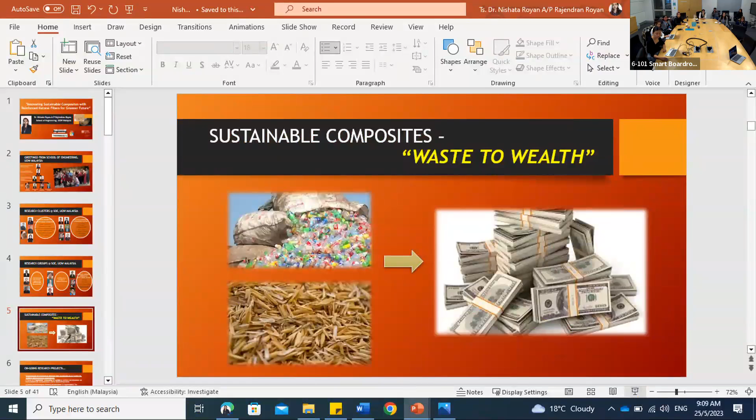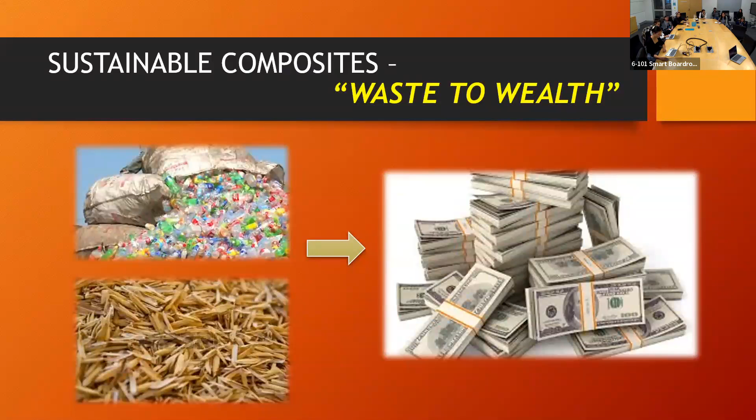Okay, sorry, so this is what I do actually - I convert waste to wealth. There are a few ongoing projects under me. I can't cover everything today, so I'm going to cover only one of the projects, but all my projects are related to natural fiber reinforced composites.

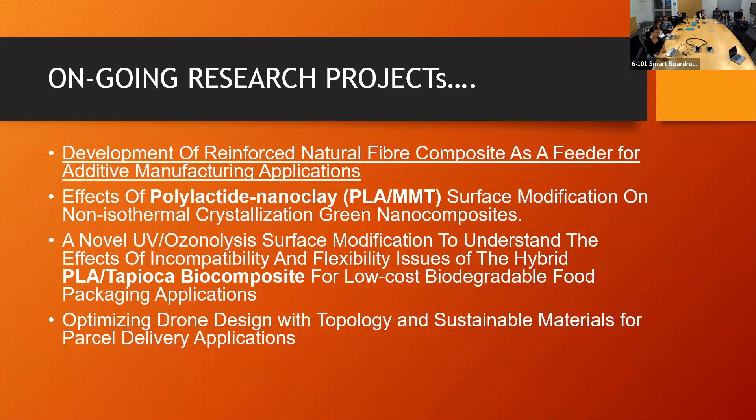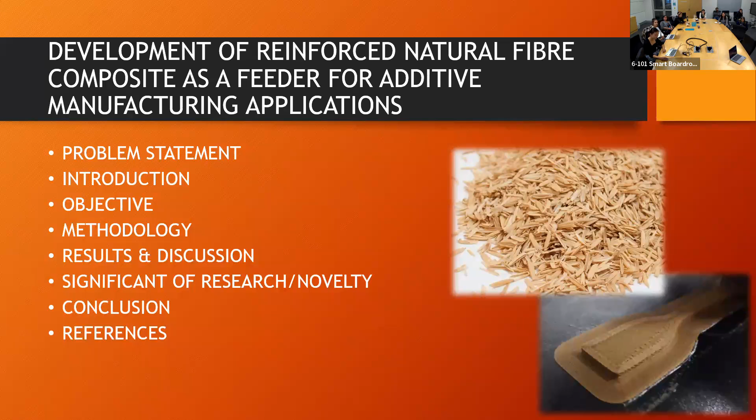I'm going to talk about the first project here, which is development of reinforced natural fiber composite as a feeder for additive manufacturing application. The title is lengthy, so let me summarize: I play with natural fiber composites. Using natural composites, I develop a feeder - the filament feeder - for additive manufacturing application. That means I 3D print from the filament that I produce from natural fiber composites.

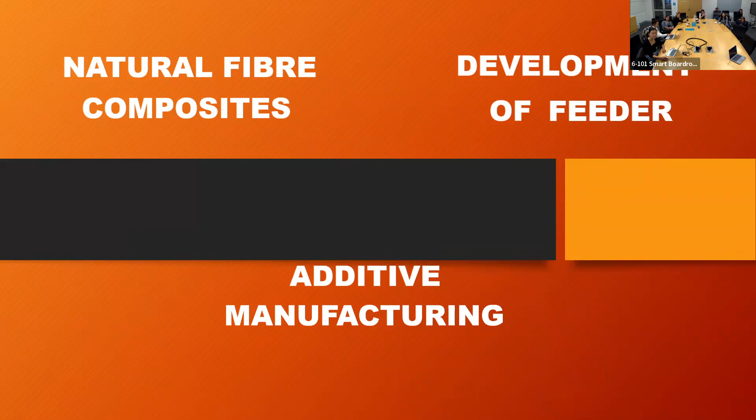So this is the interlink - why do I do this, how do I do this, and what is the outcome? The why will be covered first, and the how is basically the methodology and my results. So let's talk about why first.

Why this project? Why did I choose additive manufacturing? Why did I choose this matrix filler, rHDPE? Why rice husk? As you guys know, how bad is plastic pollution right now? We can see from statistics, 8.3 billion tons of plastic produced since 1950. And from this chart, we can know that from the year 2000, more than half of the plastics ever produced has been made.

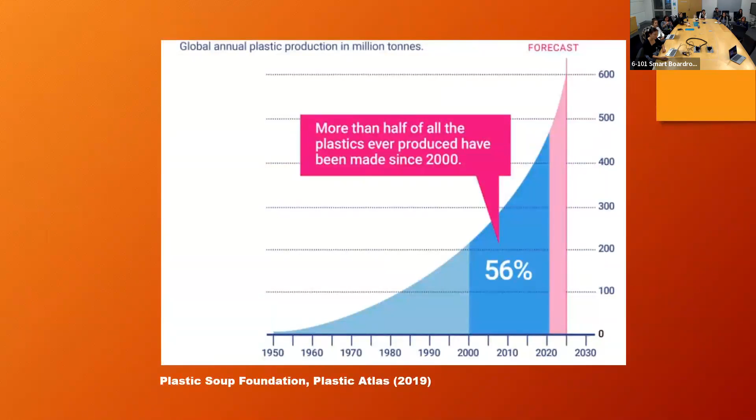If we put this into statistics, each one of us - and we have 8 billion people on Earth now - produces 625 kg of plastic waste during our entire life, which is equivalent to about 12 times my own weight. Just imagine how much plastic we are consuming and producing every day.

So what should we do? What is the solution? Of course, to come out with a green, sustainable earth. This is a solution so that we can meet our current generation's needs and also save resources for our future generation. If not, our future generation will not know what plants are, what natural resources are. They will not be able to know all that.

So why did I choose natural fiber reinforced composite? What is this natural fiber reinforced composite? Basically, I take certain natural fibers - we have kenaf, jute, rice husk, and so many things - and I mix them with a little bit of plastic, which can be biodegradable or recyclable plastic. I come out with a composite, meaning I make more plastic from less plastic. Composites are actually on par with plastics now, so if I can make something cheaper with better strength, why not?

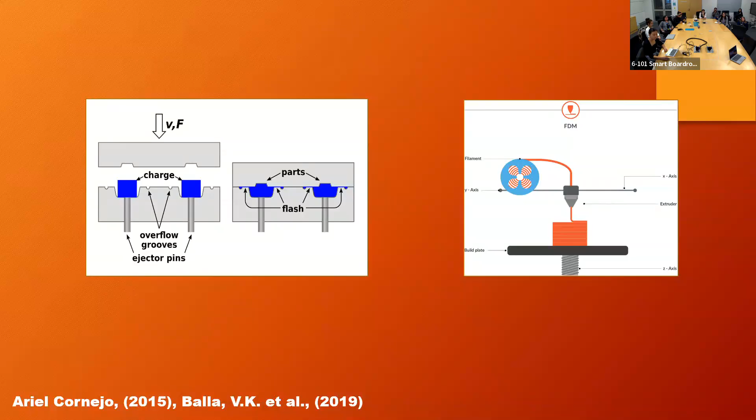Why did I choose additive manufacturing? Of course, we all know if we want to produce something, we need a mold, and making a mold consumes a lot of cost. Let's say we want to test something out just for a pilot research - we can't go through making a mold and the whole process just for that. Additive manufacturing simplifies our work. Imagine I want a pencil with a specific design - I can't go through the whole process of creating a mold just to come out with one pencil, and if there's a mistake in the design, we'd have to do it all over again. With additive manufacturing, I can straight away print whatever design I like. So the conventional method is high cost, while additive manufacturing is lower cost.

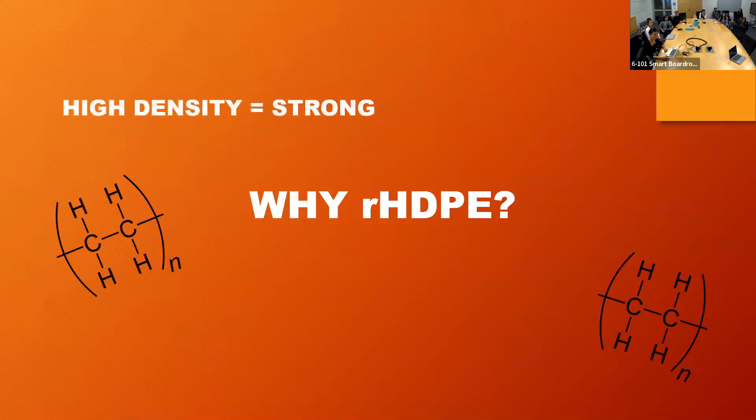So why RHDPE - recycled high density polyethylene? From the name itself, it's strong. It's very durable, very economical, it's cheap, and highly recyclable. These are the main reasons why I chose RHDPE as my matrix filler.

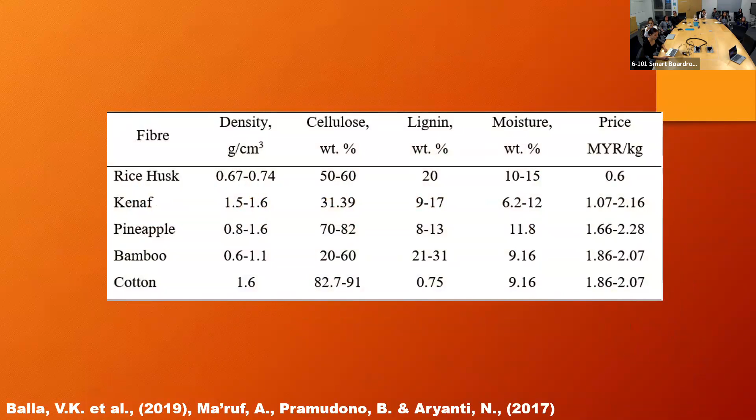And why rice husk? From all the natural fibers, rice husk is the cheapest in Malaysia, and it has a very low density with a very good lignin cellulose content. That's why we chose rice husk for this study - it's also agricultural waste, and we have a lot of this waste in Malaysia and also in Southeast Asia.

So what is the problem statement here? The problem in this specific research is that we have very limited literature because we are starting out to produce a filament which no one has done with this combination of material before. We have issues with HDPE, the polymer itself, in FDM - fused deposition modeling in 3D printing - where the characteristic of the polymer has shrinkage problems, warpage problems, and so on. There is also limited information on natural fiber reinforced composite in FDM, as this is new research, and limited info on filament production.

Nowadays we have big companies offering filament production, but that's for conventional filaments like PLA, PETG, and so on. Yes, they are doing mixtures like PLA wood, but they will not allow us to customize our filament with our own material. So this project is actually meant to solve that problem.

So there are a few objectives here: I study, I design the filament line, I 3D print and evaluate, and then I produce the composite. This is the overall flow plan - I mix, compound, crush, put it into a filament extruder, come out with a filament, 3D print, and get the specimen. It seems very easy here, right?

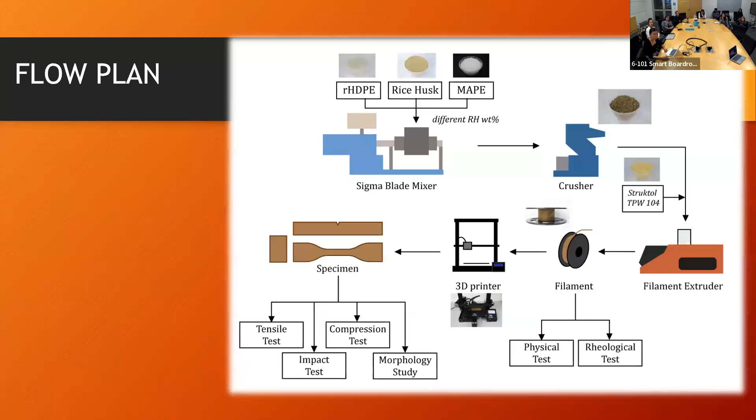And then we 3D print it, and so on.

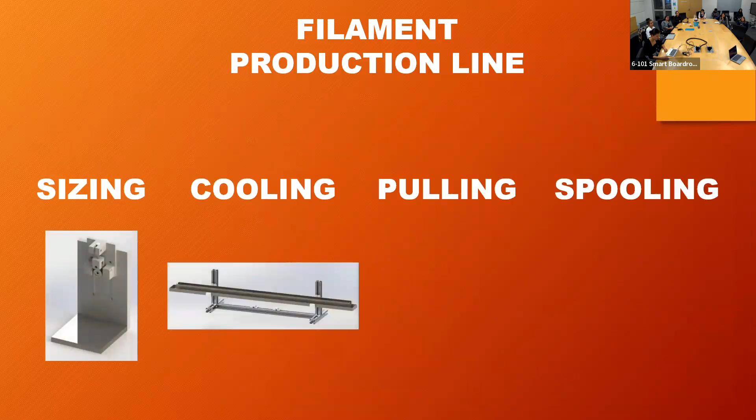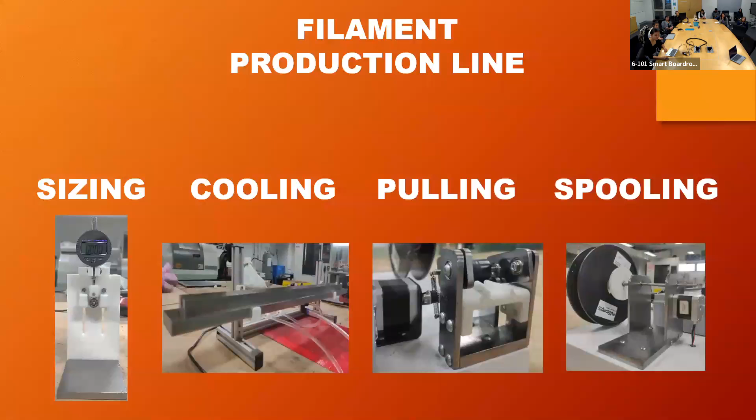So the filament production line has a few stages: sizing, cooling, pulling, and spooling. All of these have been designed and customized. We fabricated them ourselves in our School of Engineering back in Malaysia, using a conventional CNC process for some parts and 3D printing for others.

Once we've done all this, the first picture shows we're making sure the filament size is 1.75 mm, because if it's higher than that it won't go into the 3D printer. The cooling ensures it doesn't swell or shrink. The pulling creates tension so we get a nice filament. And the spooling spools up the whole filament system.

So this is the overall filament extrusion system that we have fabricated.

As I said, this is the initial stage of research, so whatever funds we had, we utilized. Of course, there is a lot of room for improvement here.

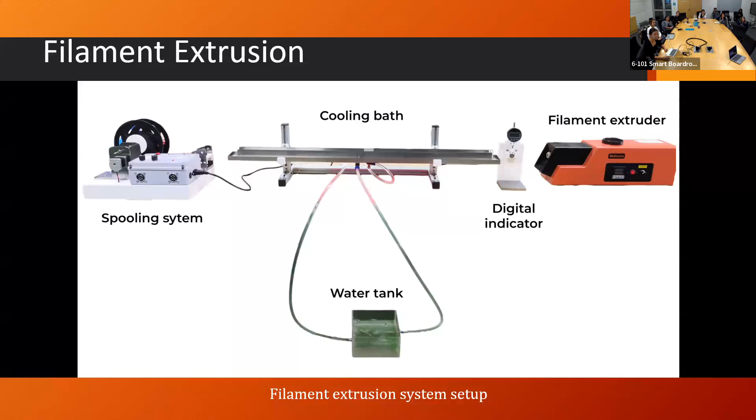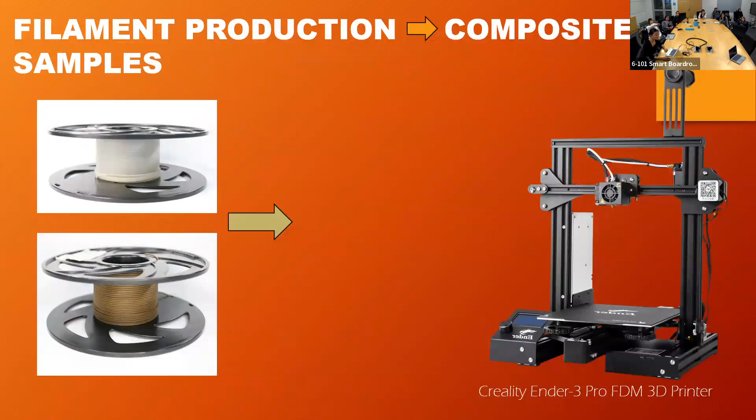With this system, we were able to produce the filament. In the two pictures, the white one is pure RHDPE. We mixed RHDPE, ran it through the system, and got the filament. The picture below is rice husk composite, with about 10% weight of rice husk composition in it.

We successfully 3D printed it. As you can see in these two pictures, we printed it with our normal printer. As I mentioned, due to cost constraints, we can do better than this with sufficient funds, so I'm working on finding sources of funding and collaboration for this project.

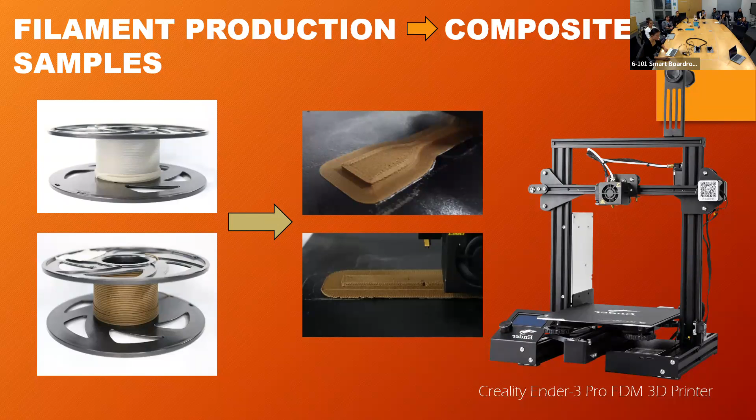We've also done some printability testing. Since this is the first time we're doing this, we're not expecting 100% perfection. There are some things we have achieved, and some things we haven't, which represent research gaps we're currently working to improve.

We achieved the overhang and the rounded shape. We did not achieve the stringing, it was only half free, and we couldn't get the sharp edge. The bridge was also only halfway, so we couldn't achieve that part either.

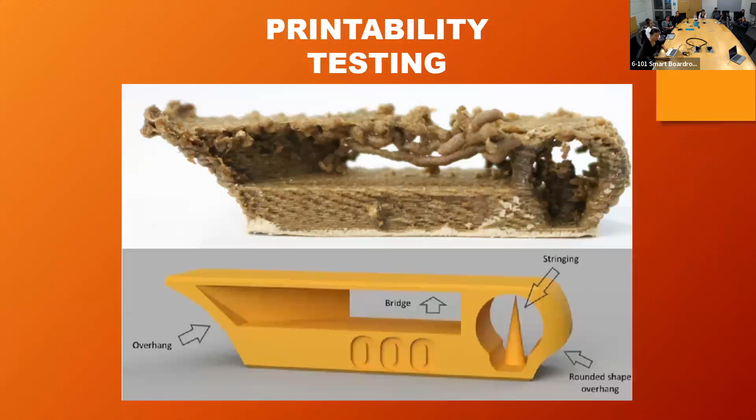So we need to go back again to the compounding process and back to the filament process. This is the stringing we didn't achieve, we got it halfway there, but it didn't join.

This is the sample we successfully 3D printed. It's not easy. We managed this after about 1.5 years of my students working on it, but we got it printed. It can be done, it just needs some improvement.

The top picture is pure RHDPE. As mentioned earlier in the problem statement, pure RHDPE has warping and shrinkage issues, and it does not stick to the printer bed or to anything by itself. So we had a very hard time getting RHDPE to stick or print properly.

We needed certain rafting and settings to manage it. You can see some warping at that corner. This is the rice husk composite, we successfully printed it, but there are a lot of voids and gaps in the specimen itself.

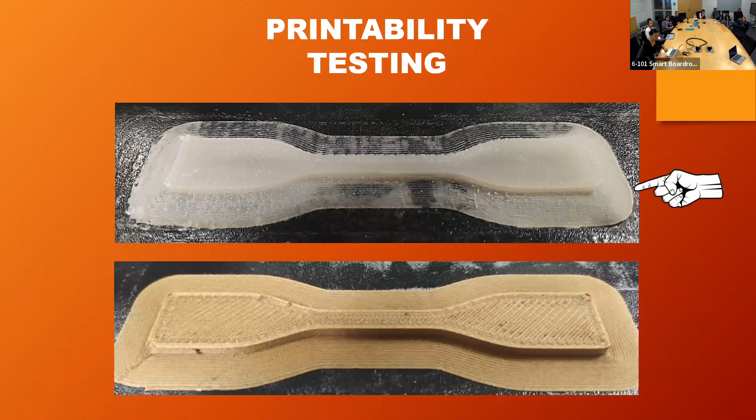So these are all the printed samples. The warping is very, very bad, you can see it's super bad, in compression and tensile specimens. From here, we can say that yes, it is printable, it is feasible, but there is a lot of room for improvement.

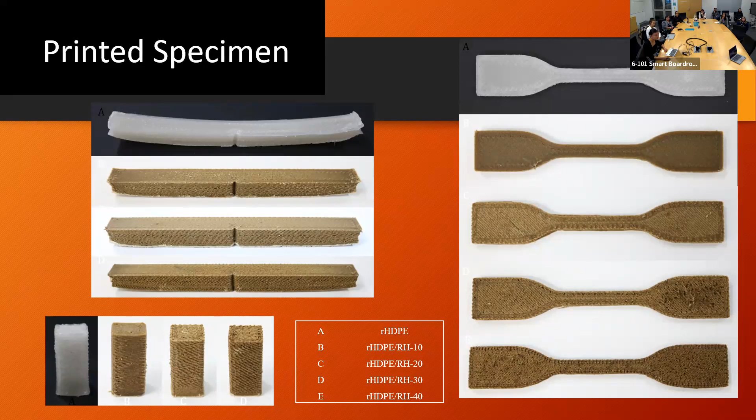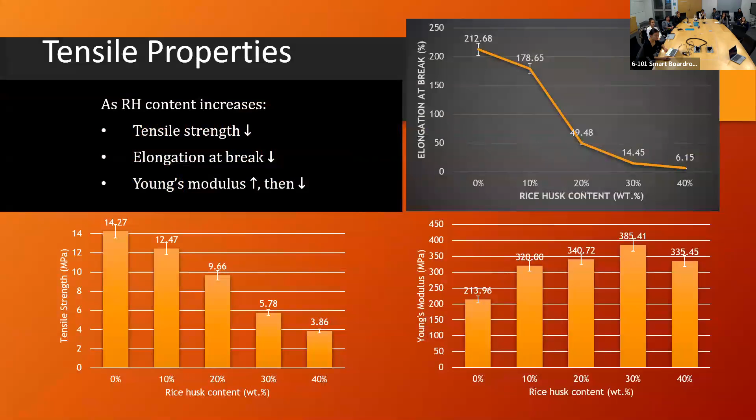These are all the mechanical properties, I won't go into detail. We have results for samples A, B, C, D, representing different weight percentages of rice husk composition, along with their tensile properties, compression properties, and impact properties.

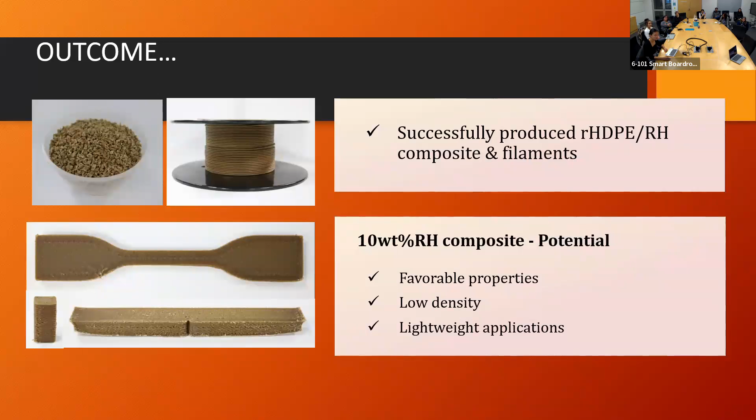So this is the outcome. We managed to compound, we managed to come up with a filament, and we managed to 3D print. So we have successfully printed the specimen, but of course there's a lot of room for improvements needed. So why are we doing all these projects?

So we can actually apply it in the automotive industry, where we can customize with a sustainable material. So let's say your armrest in your car, you want it in such a design. We can come out with a design and print it for you with a sustainable material, a cheaper cost, and a lighter weight. And of course, with a lighter part, you save on the weight and you save on the consumption as well. So everything goes back there.

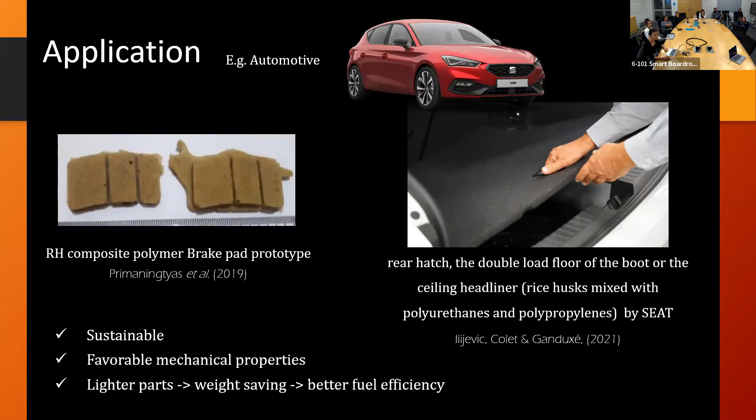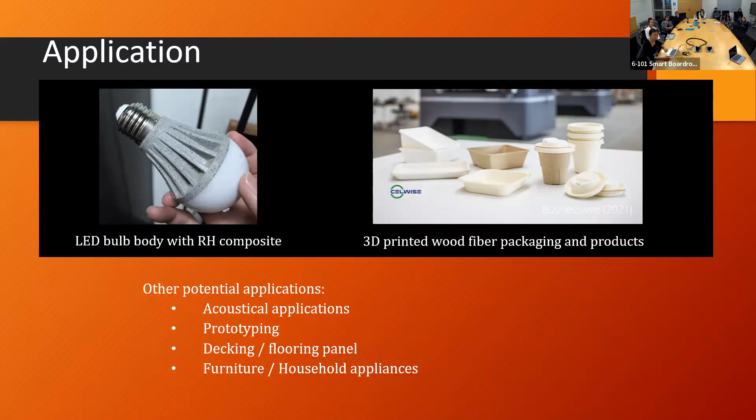And also 3D printed wood fiber, we are also looking at that. This is what we have tried, ongoing. I've seen the cafes around here, everyone is using wood, right? Assume wood. So why not we substitute the wood with some sort of natural fiber composite, like rice husk?

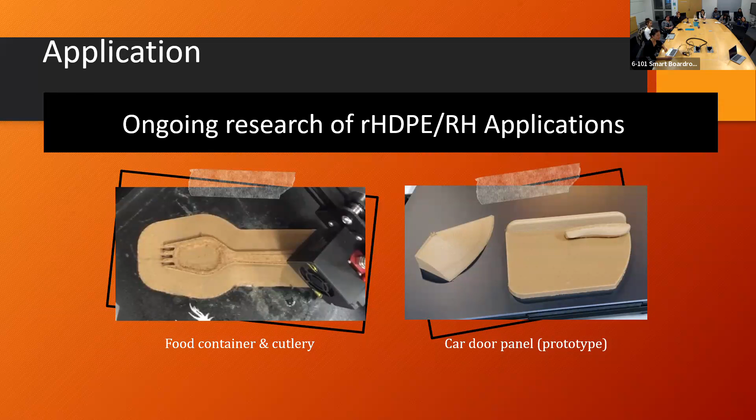Because with wood, we still have to get the timber, and the timber we still get from the forest. So we are actually contributing to deforestation. When I visited SBRC, everything was in timber. So maybe we can work on something where we put in composite rice husk material to replace timber. That's what we are working on.

So these are the future recommendations. You can see there's a lot of gaps in this research, but we are working on it.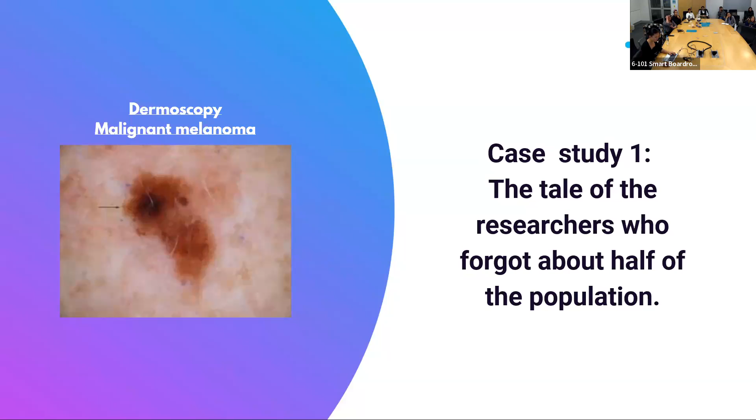So we move on - next case study is my own tale. Once upon a time, I was doing my first research involving machine learning, and I chose to deal with concrete because it was a demand we had in our lab. We work with non-conventional concrete, like slag concrete, fiber concrete, graphene oxide, and so on. We cannot use the same methods for mix design on non-conventional concrete as we do for conventional concrete. So we thought, we have this tool that does really difficult calculations involving anything - let's apply this to our research.

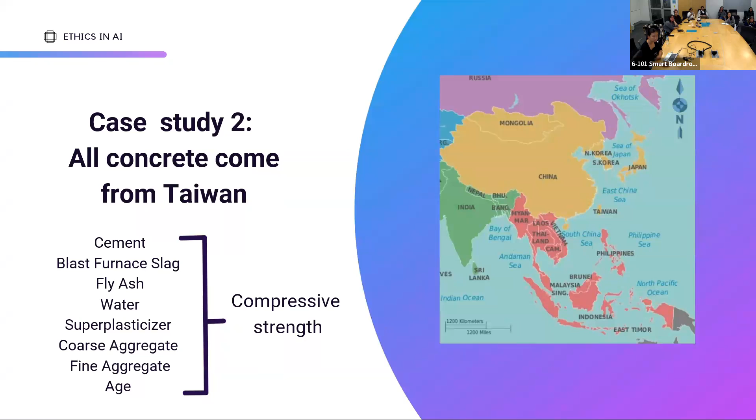Before starting with non-conventional concrete, we tried to understand how it operates in conventional concrete. We got a set of 1,000 concrete mix designs - they come with cement consumption, water consumption, aggregate consumption, and deliver the compressive strength of the concrete, which is what we usually aim for. I'm a civil engineer. We used our models on this data set of 1,000 concretes from a Taiwanese researcher, and compared it to the literature. People had amazing models with 0.89, 0.93 determination coefficients. We got 0.82, but we used a really small fraction of the data. So it was great results, and I said, congrats, let's publish it.

Then we had another set of concrete mixtures laying around from different work. So I said, we've trained our model with this concrete from the Taiwanese researcher - why not test it with this other data set that we have from all over the world?

So we trained with about 400 mixture designs, and we tested with 339 other mix designs, and we got 0.42. I'm like, what is happening here? Why are our results so low, especially compared to the literature?

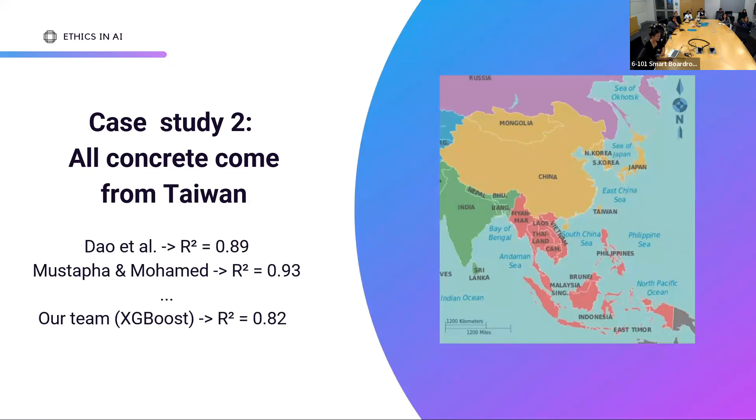Everybody was getting 0.85, 0.95, and so on. So we tried to dig out what was happening in the dataset, and we found out that the dataset was assembled in Southeast Asia and East Asia, with research on concrete from 87 to 97, and we know concrete technology has grown since then. And the aggregates were really small, nothing like what people usually do nowadays. So it's not that our model was bad, it was just not representative of reality.

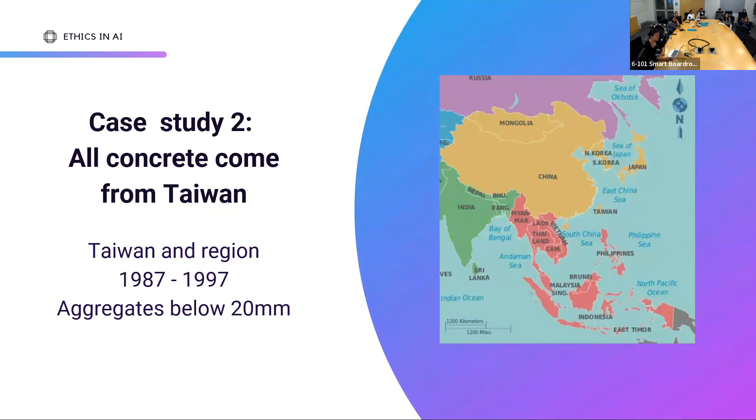So now we published it. We used this argument and published. We were talking about what's happening there. Are these things still happening everywhere else in the world?

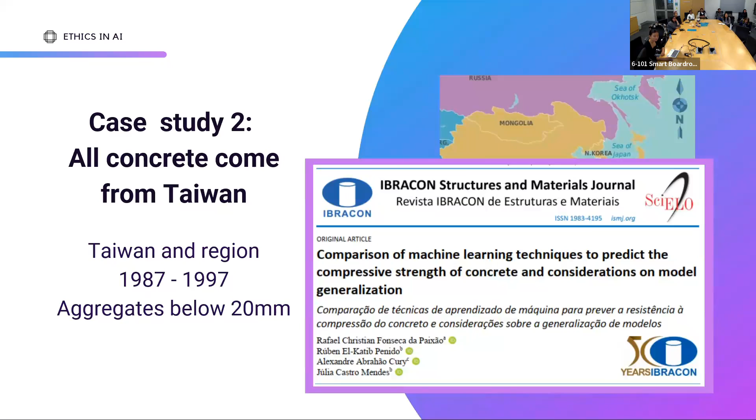We tend to think sometimes that algorithms, or the models generated by them, are fair, unbiased, impartial, because they use mathematics and statistics, really hard stuff. But it's not purely objective, because even though the calculations might be impartial, AI is about data, and not all data is unbiased. So if you have data with gender, race, or any other type of imbalance, the algorithm will perpetuate those biases.

A good example of this happened with Amazon in 2018. It was really controversial. They used a machine learning algorithm to pre-select resumes of applicants, and they trained this algorithm with their own database of developers, which were mostly men. So, to no one's surprise, the algorithm only picked men for that selection process.

So based on these stories and the things we've been seeing around, doing in our labs, being published, my team and I came up with a seminar: the 7 sins of AI algorithms. So buckle up. The first one: inconclusive evidence and unjustified actions.

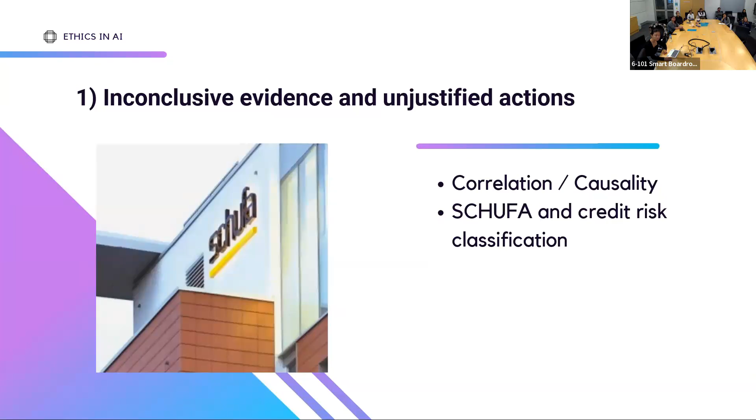Second thing: incomprehensible evidence and opacity. Most machine learning algorithms are what we call black boxes. You know the input, you know the output, you don't know what's happening in between. This is really important when we're talking about things that deal with human lives.

When you're applying this to concrete, to structural engineering, to robotics, or to automation—autonomous cars are a big example—there have been fatal accidents, but we don't know how the algorithm operates, so we don't know why the accident happened. How can that be?

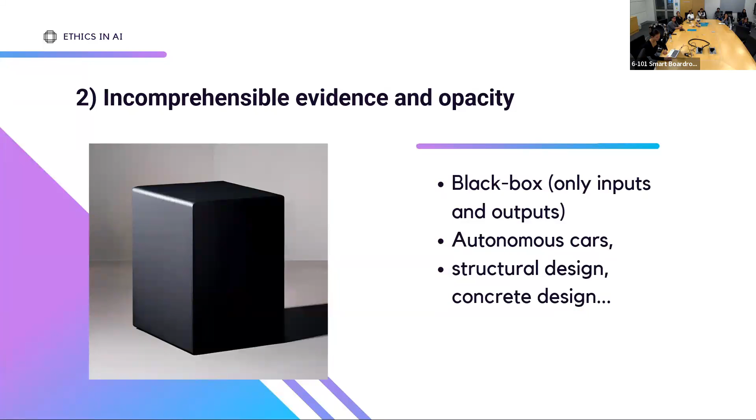The third thing is misguided evidence and biases, because the quality of the automated decisions algorithms make is based on the quality of the data they process. So when we train, for example, the Amazon hiring case, or when we're building models with a Taiwan-based database, it doesn't mean the algorithms are inherently bad, but we must recognize the conditions and limitations of what we're developing and proposing. Otherwise, we are very faulty with our ethics of work.

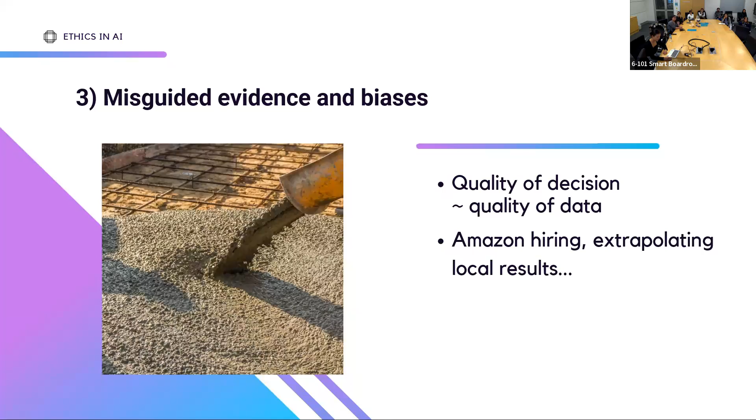For example, the melanoma model could prevent people of color from getting early access to treatment because it was wrong. Imagine if it were implemented in a real hospital.

Also, we've been visiting labs, and some of the labs we visited in the Industry 4.0 hub were only designed for right-handed people. So left-handed people wouldn't get enough training—their training wouldn't be as good.

I'm stopping here a little bit to focus more on number 5, which is negligence, because it's the one we've been seeing a lot in our practice nowadays.

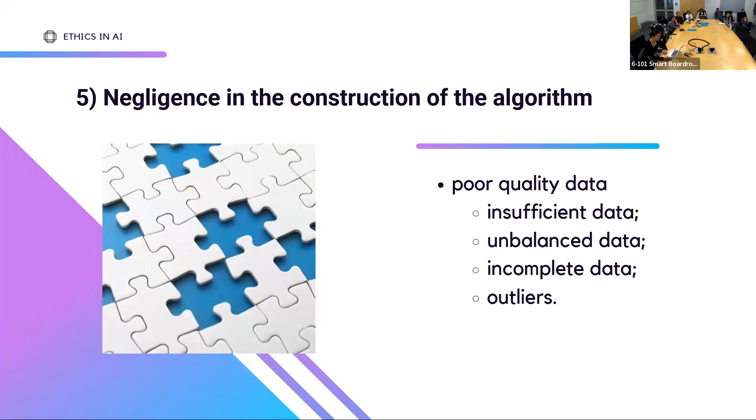The first item of negligence is poor quality data, like I mentioned as an example earlier. We have insufficient data, unbalanced data where some categories are much more represented than others, incomplete data, and outliers. We have to analyze our data before developing the model and take the measures necessary to correct them. For example, getting more derma photos from other types of people around the world would be an option.

We also deal with overfitting, which is when the algorithm trains so particularly to a certain model that it memorizes it, and instead cannot be generalized to other types of concrete, like the Taiwanese example of concrete. We have underfitting as well.

Underfitting is when our model cannot accurately represent any correlation, any pattern—the model is just not adjusted to the data. There are several tools and strategies to improve your performance, but most of the time we end up falling into overfitting because it's easy. Everybody wants to see great data. We think you can only publish if you have an R2 above 0.9 and so on. This is poor science being done.

We also have something called data leakage. We usually think of data leakage in terms of privacy concerns, but here I'm talking about some of your inputs from the testing data set going into the training data set.

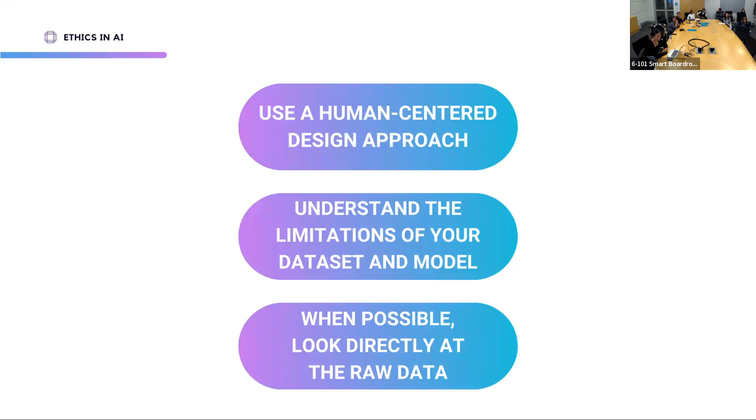Second, understand the limitations of our dataset and our model. And third, when possible, look directly at the raw data. We have to understand our input data as much as possible, because what we feed is directly tied to the results we are getting from it.

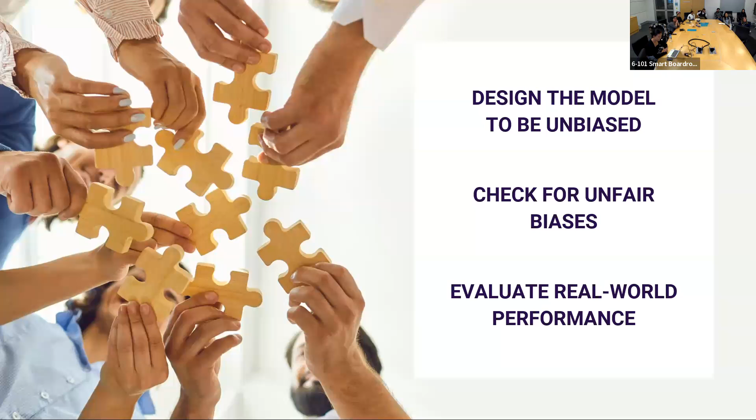And finally, design the model to be interpretable. Nowadays there are lots of tools being developed to try to open up those black boxes and understand what types of calculations the algorithm is doing. Some models are much more transparent than others, and we can try to select those — for example, decision trees, which are much more transparent than other types of machine learning models.

And finally, keep learning, because there's a big chance that in 5 or 10 years everything I've said will be useless, will have evolved, will be dealing with new problems, because this area is evolving so fast. We have people from all backgrounds jumping in, which is great because we get more applications and more different people working on it, but it's also bad, because if you're just jumping in without strapping your seatbelt on, knowing how to drive, you're probably going to make one of those mistakes previously explained today.

One important thing we should all keep in mind is that these problems will not go away with just technological thinking — it has to involve social, cultural, legal, and political aspects as well, because social responsibility and technology development have to go hand in hand.